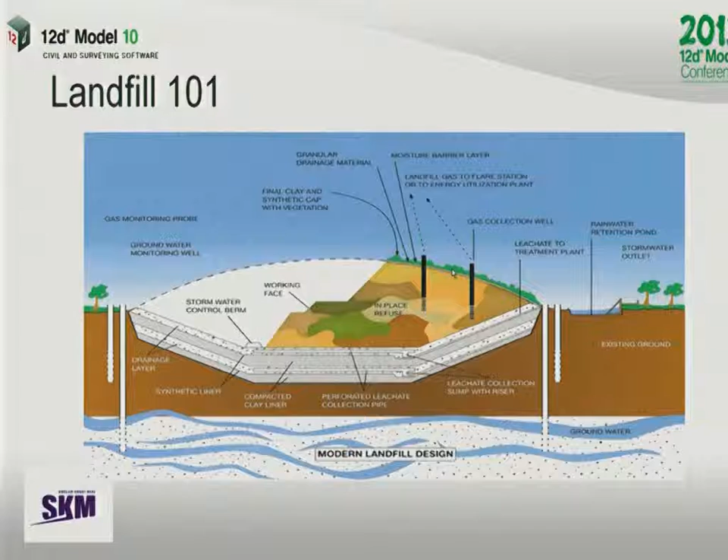The other challenge in this model was the fact we had to model multiple layers on the landfill. So this is a pretty diagrammatic picture of a landfill. We had to model the base layer, and then also the drainage layer, the waste area, and also the capping layer. So all of these layers had to be completely 3D modelled, and then we were pulling earthworks quantities from between them. So if I flip into the model now.

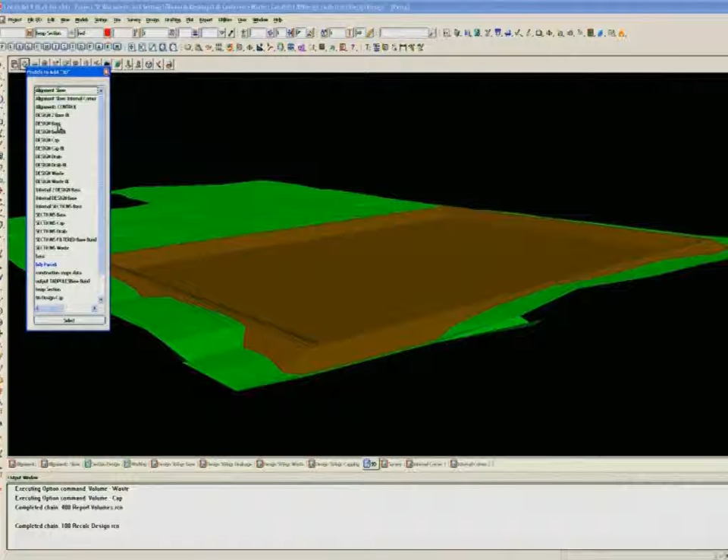So I was quite fortunate in the fact that the Christchurch engineer didn't have much imagination and went with a nice square landfill, made it a bit easier for me to model first up. So what we've basically got is a nice flat area in the middle with a bund around the outside, so that's the base layer, and the drainage layer goes inside that, and then eventually once all the waste is in there, it's going to be a mounded landfill at the end.

Now, I have quickly reproduced this model because I wanted to show the planning side of things rather than the finished product. It's actually going to be done in cells, so we won't build the whole landfill at once. It's something like a 10-year project or a 20-year project.

If I go have a look at the alignments that control this landfill, there's only 3 of them. We've got this main one that controls the length, and then another one that controls the width, and then a third one that goes around the top of the batter. So these are the only 3 alignments I need to change any of the parameters in the landfill.

There's then a series of slave alignments which sit on top of those and are fully computated off them. I can come in and change these alignments if I need to. So for instance, if I need to change a batter slope or change the actual full height of the landfill, things like that, you still have to come in and play with these slave alignments. But generally, you're just working with these 3.

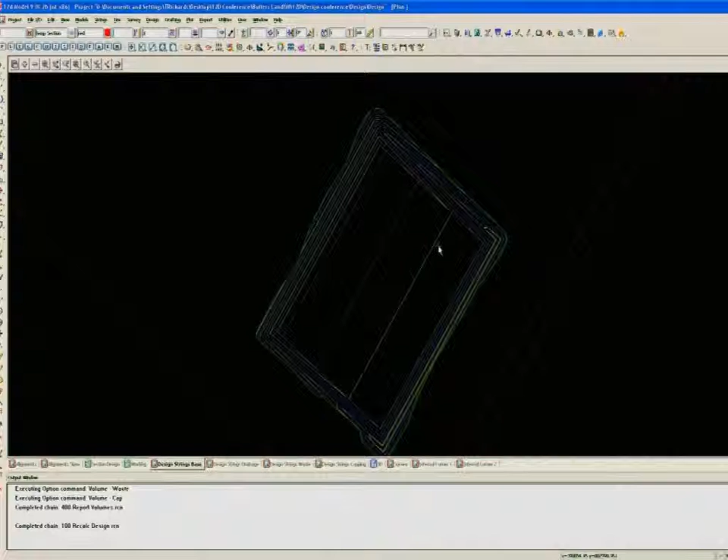Off all these alignments, I'm then using MTF and apply many functions to produce a whole lot of design strings and tins for each layer of the landfill. And if we look at it in section, you can see the different surfaces that I'm creating. So there's the base layer, the top of the drainage layer, then all of this is waste, and then you've got the capping layer on the top. And I can create volume calcs between all of these layers.

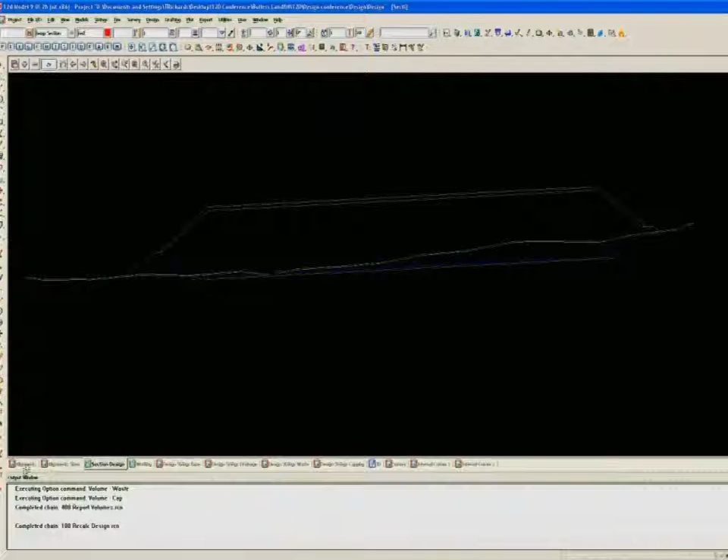So if you go back into design strings, one of the things we had to do in this was we were constantly changing the size of the landfill because the client and the designer couldn't make up their minds what they wanted, which is a little bit frustrating, but it helps me come up with a solution. So if I go into this alignment here, and let's say I increase the size of the landfill by 10 metres.

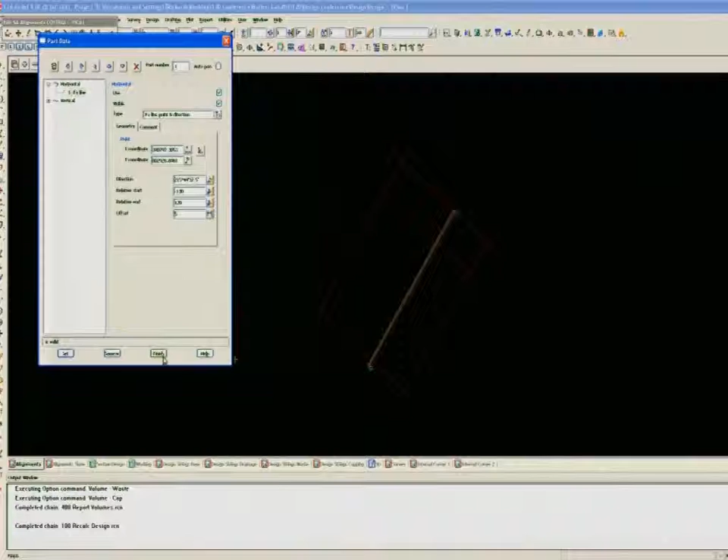So that's extended this alignment just here. All I have to do is close the alignment editor and find my recalc menu, which seems to have disappeared. It's over on the other page somewhere. Okay, and then I just recalc the design. That's gone through and extended the landfill. All these strings have changed. We go back and look at this 3D model, that's grown by 10 metres.

And I'm not just limited to going backwards and forwards, I can also change the width, change the height, pick up the whole landfill, move it down the site, change anything I want in there. The other thing that got created when I ran that chain was a series of volume reports between all the surfaces, which I'll talk about in a second.

So if I go and have a look at one of these corners on this landfill, this is the complicated thing and why I had to use all these slave alignments. And I know this has now been fixed in version 10, which I can't wait to get hold of. But when you do a right angle corner, I'm sure you've all come across these loops that you get in your design strings. And there's a few ways you can go about fixing this. One of them is you can use a modifier to remove the string.

That's chainage based at the moment, so it means that as soon as you change the length of your alignments, you have to go back in and change the MTF file. So I said that wasn't an acceptable solution for us. And the other option was to put a radius on this corner so you don't get the loop. To me, that's having the modelling program drive your model, which isn't where you want to be. You want to be having your model being the key part.

So the solution we came up with was to put another alignment string along the bottom there, which is computated off this main alignment string. So that's fully computated, and it means that we can then run a second MTF file on top of that alignment string to create all the surfaces.

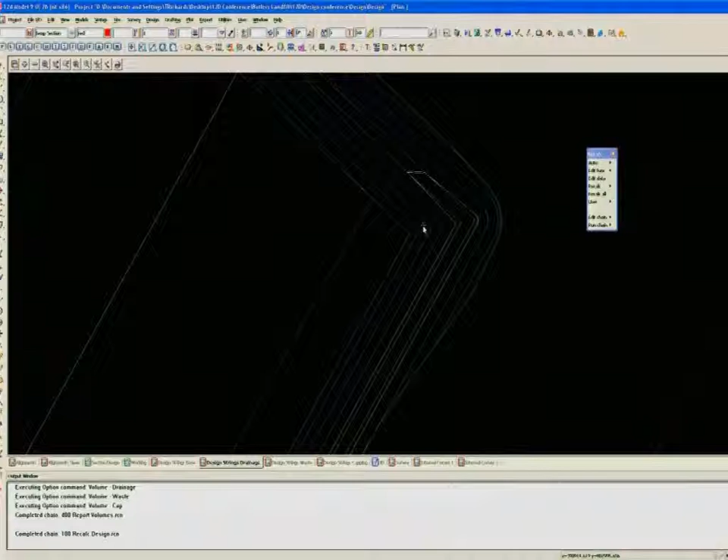The other thing I did here was I used another alignment string to make a break line for our tin. If you triangulate this without the break line, you'll get these flat areas in the top here where the triangles are just creating off the nearest 3 points. So by putting a break line in, you can get your contours getting this nice sharp corner in here. And that break line's fully computated to those 2 points in both vertical and horizontal. So if you move anything, it'll go with it.

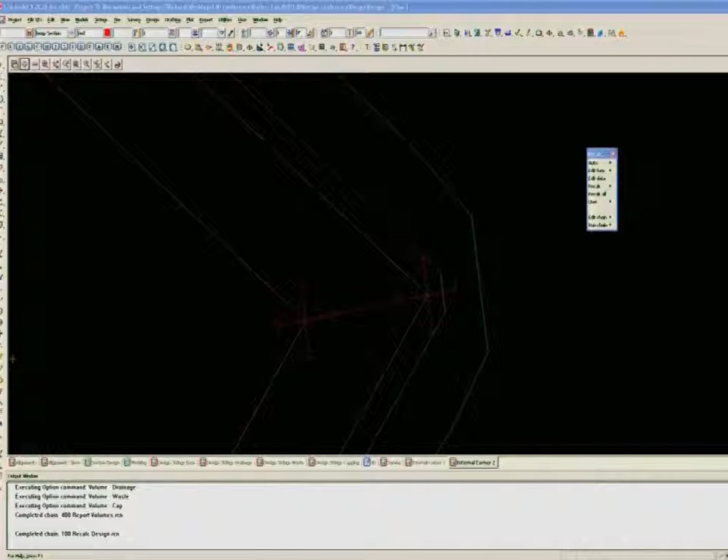So like I said earlier, we had to get this bulk earthworks completely balancing. And part of that chain file wrote out a series of bulk earthworks reports, which I've then read into an Excel spreadsheet. And you just have to re-import all those report files, and you can quickly see what your volumes are doing. So I can have a look at my waste storage. We targeted 350,000 cube, so we're around about right there.

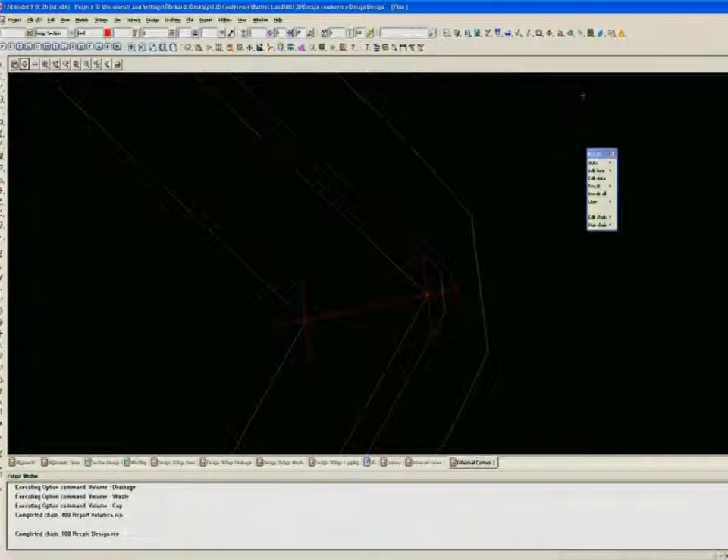And the other thing is we can look at the balance of earthworks. So this spreadsheet's telling me I have to lower my landfill. So if I go back into the model and lower my, where's my mouse gone? All I have to do to lower my landfill is go back into this MTF alignment.

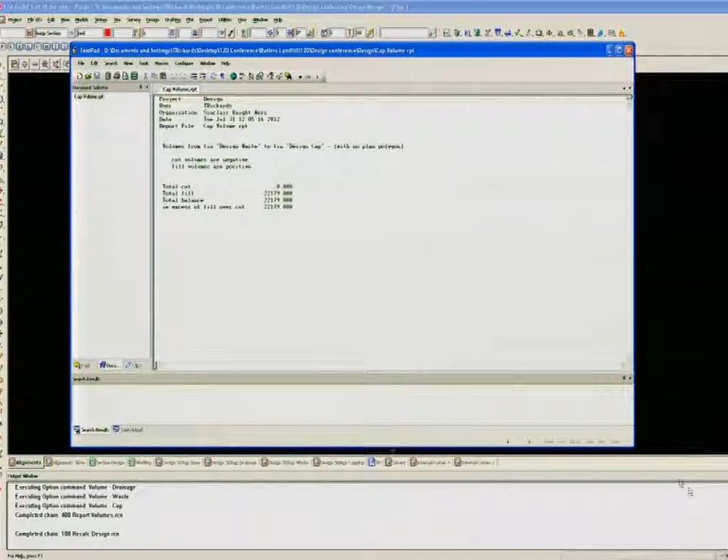And I can just change this, lower it by 0.5 metre, set, finish, and rerun all my design. It's recalculated all those volumes for me. If I go back to my Excel spreadsheet and reread in those volume reports, you can see that the balance has now come back to about where you want. Admittedly, I did know what to change it to there, so that was cheating.

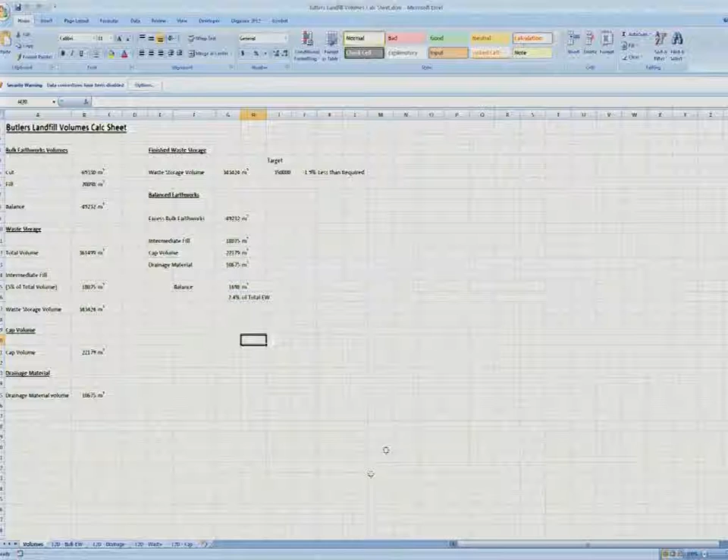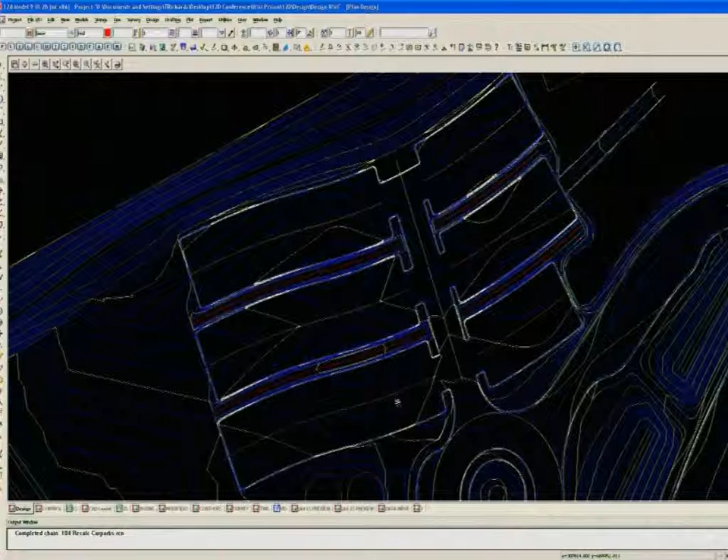The other project I wanted to have a quick look at was an urban infrastructure job we're doing in Auckland at the moment, and it's a car park design. This is a lot more complicated than quite a simple square landfill, but we've basically modelled it using the same technique of a master string and then some slave strings off that. A couple of things in this design is we've got changing grades across the car park. We've got one curb string that goes right the way around in and out of all these little car park areas, and we've also got some swales in here which were a bit of a challenge to model.

So these are the control strings that model this. That one there is the master one. That controls the height of all of that car park. It also controls the radius on these bends. Then you've got these four, which are all offset from that master, and the grade is offset between them, so you can make the grade go up and down at 3% or 2% or whatever grade you want. And it's all just a matter of going in and changing those computators to change that.

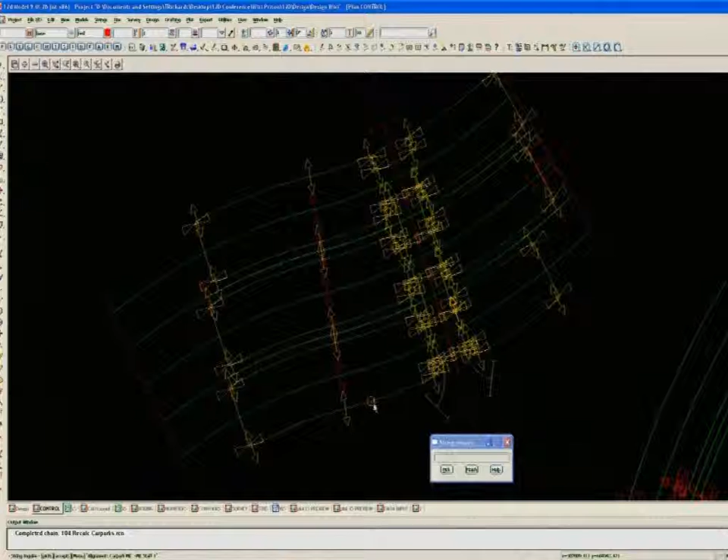Finally, we've got this one master string that runs up the middle, which is the access road to them. Then you've got a slave alignment, which is the curb line that runs around the outside. Now, admittedly, I had to use chainage in this, which is something I really hate doing, using chainage in my computators. Really, again, looking forward to version 10 where I don't have to do that anymore. Because if you're using chainage and change anything, then you have to go back and reset all your chainages to get it right.

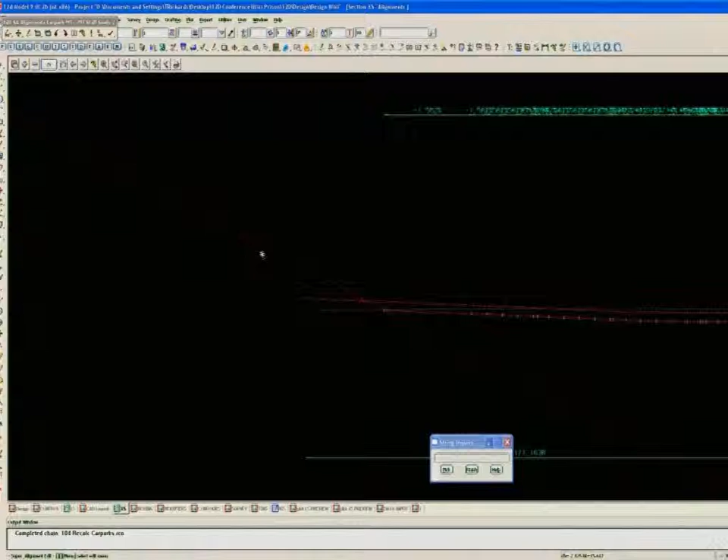The other thing interesting here was the slave alignments I used to do the swales. So if we have a look at this section, that top red line is the master alignment, and then I've done a slave alignment underneath it, which is just a vertical offset for the invert of the swale. But if I go and select on this, you see there's a second line that's come up here, which is what I'm using to control where these design strings start.

If you don't have any vertical geometry on your alignment, you can't put any design strings on it, and I've sort of used that to my advantage by having a fixed line which is there in the vertical geometry but has actually been made invisible, so it gets removed. And it means I can set a grade from the back of my curb down to the start of my design strings, and it's fully computated, and it will start that swale wherever I want it to.

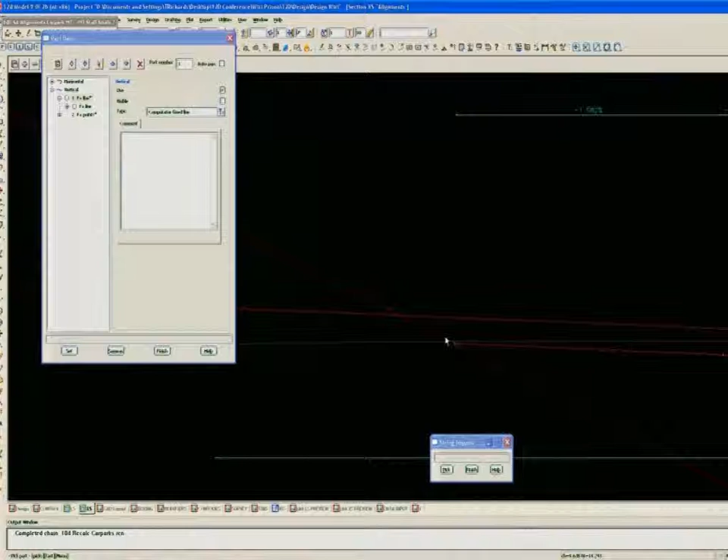So if I go back to the design, I can completely rerun this. It's got a tendency to break on me, which I don't see as an issue. Even if you're rerunning a chain and all your alignments and they break on you, it's still quicker to go through and fix the computator that's broken than to redo this entire project from scratch like you would have to otherwise. So that's the major benefit of using computators in this sort of design.